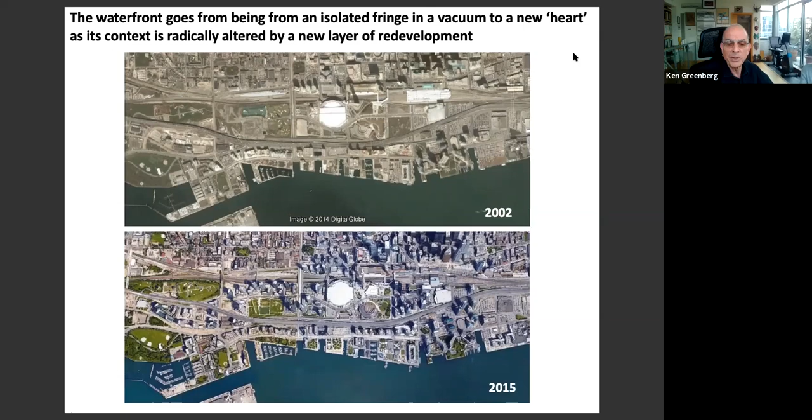I'm really pleased that my friend and colleague, and I would say mentor, David Crombie, is on this call, because since the 1980s we have been really fortunate in Toronto to be guided by a set of values that David Crombie articulated in his Waterfront Regeneration Trust, simply as clean, green, accessible to all. This has served as a set of powerful guideposts for us ever since.

Next. Oh, sorry, hang on. Sorry, one second. Okay, pardon me, something just odd happened. Bear with us for a second. Okay, let's see, share, hang on. Sorry, we just had a little glitch there. I'm not sure exactly what happened, but we'll get back on track. Hang on. Okay, one second, sorry about that, people. Okay, I'm gonna have to... all right, there we are, okay. Ken, do you want the screen after this? Yeah, can you bring the screen back? I'm not seeing it. Oh, you're not seeing it? No. Oh, okay, I'll try it again. Okay, here we go again. Let's make this - are you seeing it now? Because according to me, I'm sharing the screen. No? Not yet. Okay, I apologize for the technical glitches. Okay, I'll start. Okay, just bear with us for one second. If all else fails, I can grab the PowerPoint. Yeah, it's okay, no, it's okay. I occasionally - Zoom's an amazing tool, but it isn't always perfect. Okay, do you see it now? There we are, okay, go to the next.

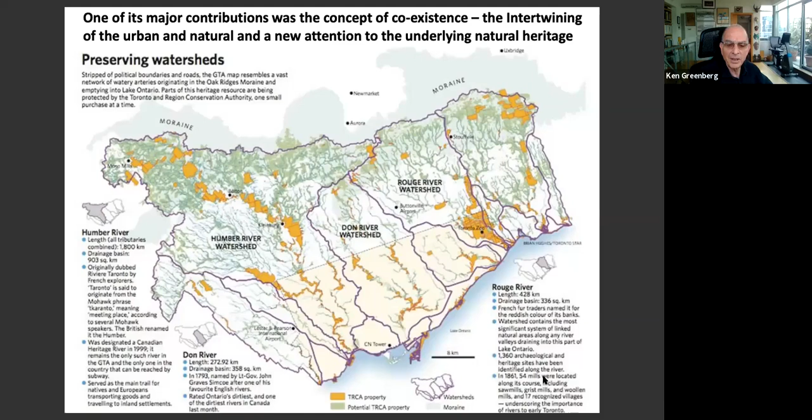Speaking of things that we found that we have inherited, that natural heritage is the most profound and significant layer that we are now reinterpreting. Next.

We have been, again, lucky in Toronto that we have an organization called Waterfront Toronto. This is a highly resilient organization, it's been around since 2001, and it was originally developed for an Olympic bid, which did not succeed. But through political administration after political administration - and those of you from Toronto will recognize previous generations of politicians, municipal, federal, and provincial - it has continued to provide guidance as we've undergone this massive change, with a commitment to community engagement and also calling attention to those found resources. Next.

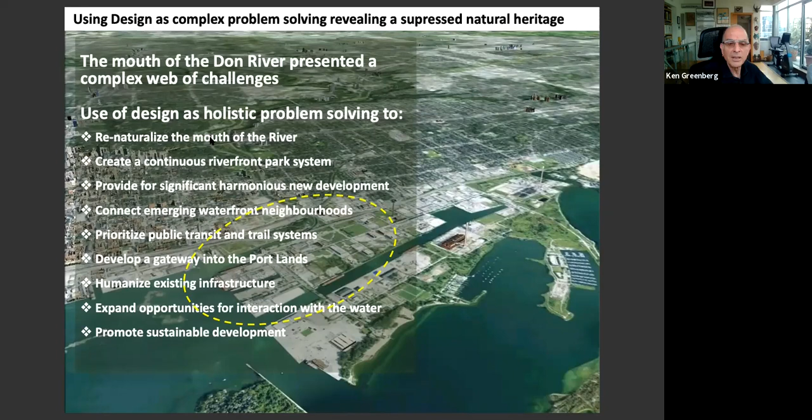What really inspired it was going back in time to the point when the Toronto Port Lands, some 800 acres, had actually been the largest wetlands on the Great Lakes, filled in 1912 by the Toronto Harbor Commission for an industrial era that never quite materialized for a number of reasons. Now there's a new opportunity to go back to that natural heritage and solve a flood-proofing problem and a whole host of other problems by creating this new river mouth with generous parklands.

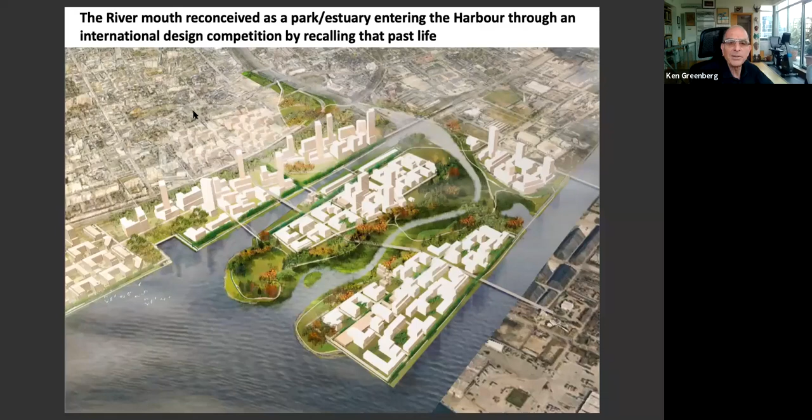So here you see this massive construction project that is currently underway. You can see in the curvilinear forms the river, which is reappearing, this natural feature, literally a ghost from the past, reappearing in the Toronto waterfront.

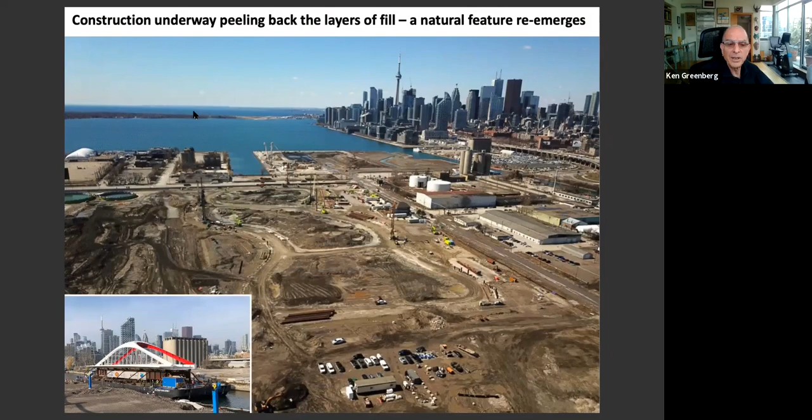And here are some images of the life which it now supports. So this found infrastructure is now reflecting an entirely different set of societal priorities.

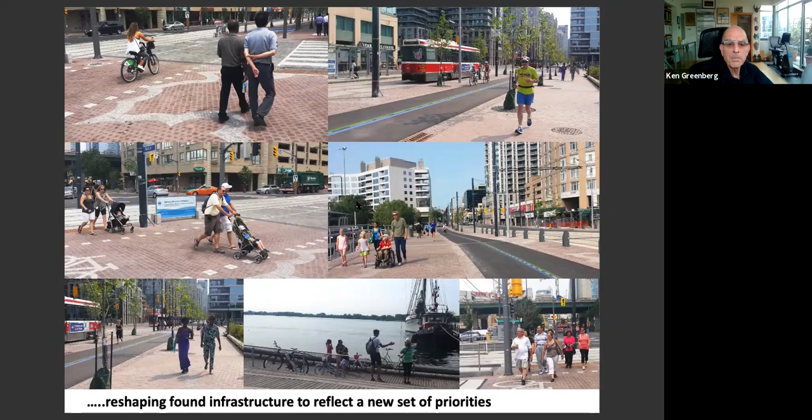So now I'm going to talk about the Bentway, which is one of the most extraordinary projects I've had the privilege to be involved in. And this is another case of an objet trouvé, a found object on the waterfront.

So this is an image of the Gardiner Expressway being built when this was all industrial. You can see Molson's, you can see the old Maple Leaf Stadium, you can see the Canada Malting in full operation - all of these industrial properties, Fort York barely surviving the highway, which was pushed slightly to the side to preserve it after strong citizen protests. But it was the space under the Gardiner that was so interesting.

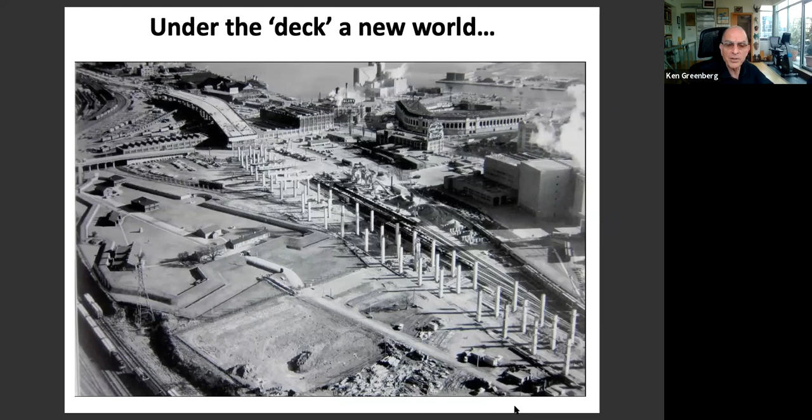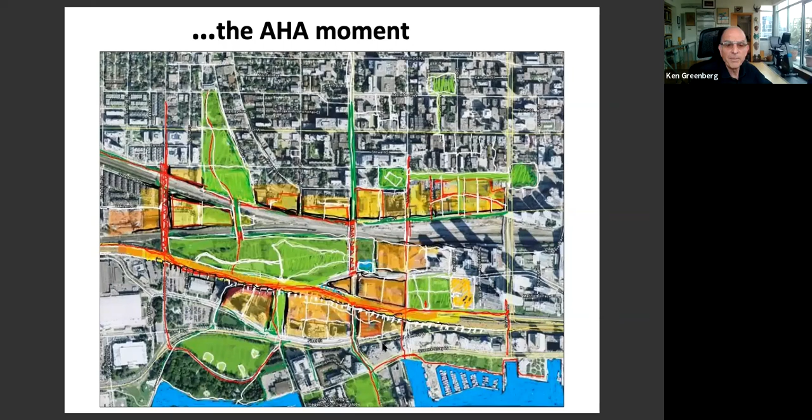This is Marcel Duchamp, with this whole idea of seeing things that are so familiar but with absolutely fresh eyes, and applying this to looking at the legacy of found spaces, found objects as reimagined places.

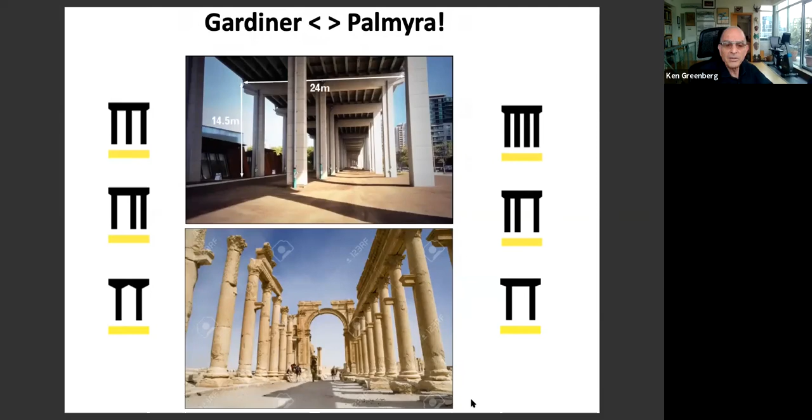So this is the way I was looking at the Gardiner, and oddly enough, the proportions of what was considered this extremely ugly intrusion across our waterfront - and in some ways it was - but almost 15 meters high, 24 meters wide, creating this magnificent canopy, which can be likened to the great arcades and colonnades of antiquity. So the opportunity here was how to reappropriate that space.

So in 2015, with an extraordinary act of civic generosity, I was approached by Judy and Will Matthews. Judy had been a colleague of mine at the City of Toronto, a city planner, and she and her husband were great benefactors of the public realm in the city, having worked on the music garden, the transformation of St. George on the university campus. They were looking for a legacy project. Etienne and I took them for a walk under the Gardiner, which you saw a moment ago, and we talked about this vision for what it could be. And lo and behold, they saw the same thing that I and we had seen.

Next. Sorry, hang on. Sorry.

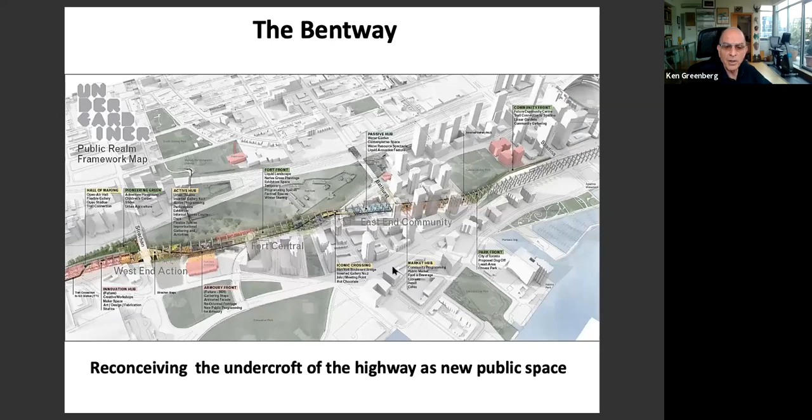So this was a drawing that was prepared with my young colleagues from Public Work, whom I brought into the picture very quickly, working with Will and Judy. I was contacted first in April. By July, we went to see the two councillors, Councillor Cressy, Councillor Layton, and Mayor Tory, and we showed this

image of what this could be, reconceiving the undercroft of the highway as a new public space. And what was so interesting about this is it was revealing the Garrison Creek, which had literally come down on the edge of Fort York. You can see where the harbor was. If you squint, you can see the lake, that bluish tone right next to Fort York.

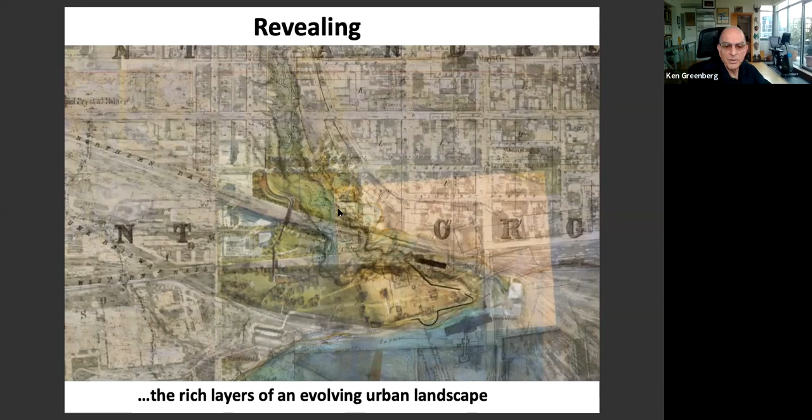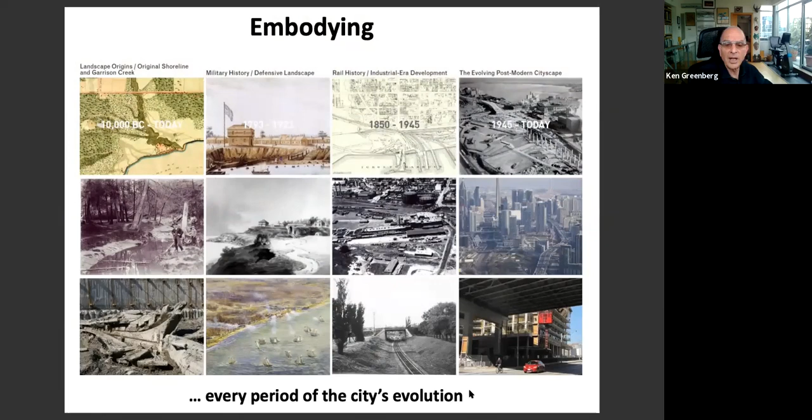And so this particular spot was so interesting because it embodied pretty much every layer of the city's history. Here, it had the capacity to tell all of these stories. The echoes of all these past lives were embodied at this particular spot. And so it was about literally connecting all these pieces of the emerging world.

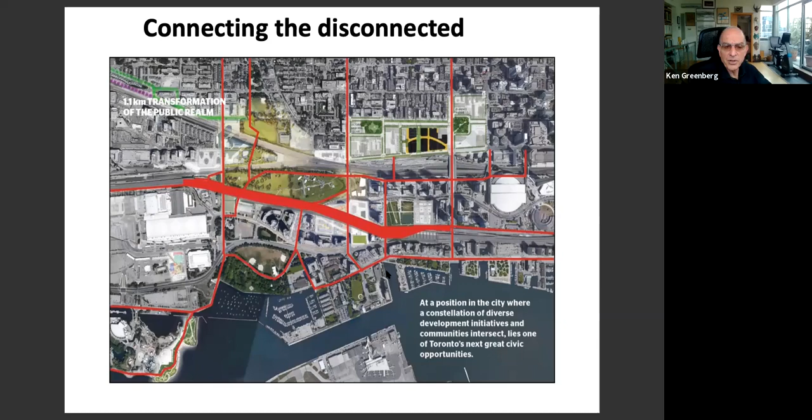It turned out to be an extraordinarily useful device, which had we not found it, we never could have afforded to create this great urban colonnade, this civic space in this location. But all of these thin red lines, along with the thick red line of the undercroft of the Gardiner, are part of the Bentway network. Some of these existed, many of them have been created since.

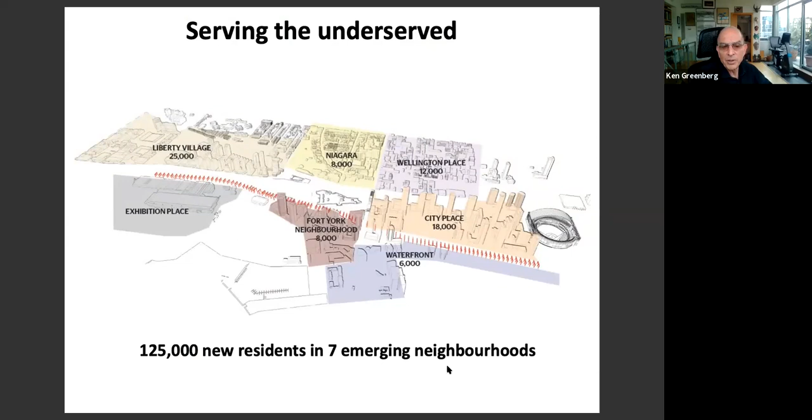So who would have imagined that this highway built in the mid-20th century, essentially to carry cars and trucks, would end up providing shelter for this great civic living room. And serving, by now, nearly 125,000 residents who have come to live in all these vertical neighborhoods in approximately 15 years, and who now have access to this space, which both serves them and connects them.

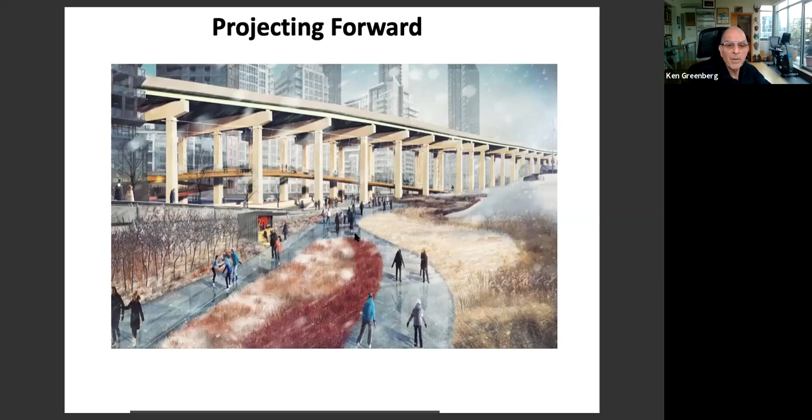What is most exciting for me as an urban designer is that when you do something like this, it sets off all these chain reactions and unexpected synergies. So at some point, quite a time ago, I identified some 16 things that probably would not have happened quite the way they did, but for the Bentway.

And now this idea of reinterpreting this found object, the elevated Gardner and the Lakeshore Corridor, the portion of it that you see running right across, about 3 kilometers across the Central Harbor, all the way from Exhibition Place over to the Don River has become a project of the City of Toronto, working with the mayor's office, with all the city departments, with a number of private actors, with the Waterfront BIA, with Waterfront Toronto, to take the spirit that the Bentway had engendered and apply that to a whole series of places across the waterfront.

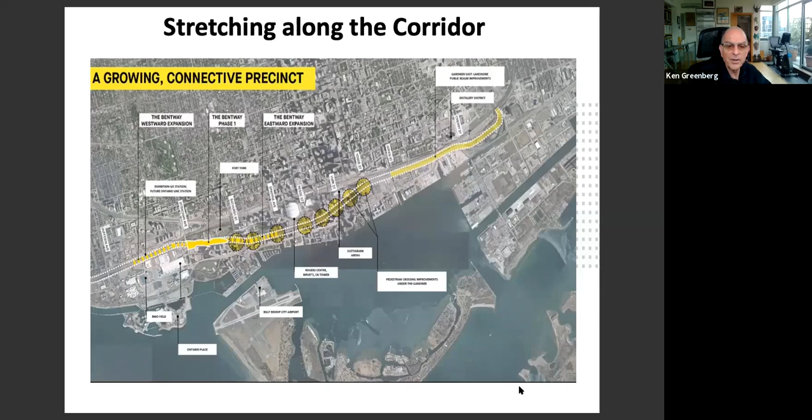And what it's producing in all of these neighborhoods is places that, but for the presence of this found structure, probably would not exist, and turning a barrier into a threshold. So I can make an analogy to Broadway cutting through the grid at an angle of New York City, and because of its angle, creating all these idiosyncrasies and all these found and special places.

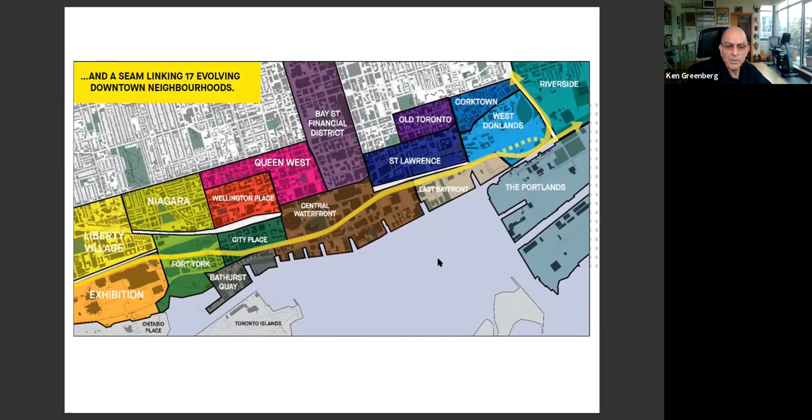So now I'm going to present something which is a bit of a cautionary tale, or an unfinished tale, about protecting a vulnerable piece of mid-20th century legacy.

Next, Ontario Place. This is a sketch done by Eberhard Zeidler, one of our best known architects in the city, when he was called upon by the provincial government of the day to create something inspired by Expo 67 in Montreal. He created this initial sketch, imagining this as a form of new urban parkland appended to the shoreline at Exhibition Place.

This great collaboration happened: Eberhard Zeidler's very precocious, technologically inspired architecture, which I refer to as the machine, collaborating with Michael Hough, an equally prominent landscape architect, unfortunately no longer with us, known for the movement to bring back the Don River, a strong ecological bent to all of his work, creating this garden setting for Zeidler's work. They worked together, so I refer to this as the machine in the garden.

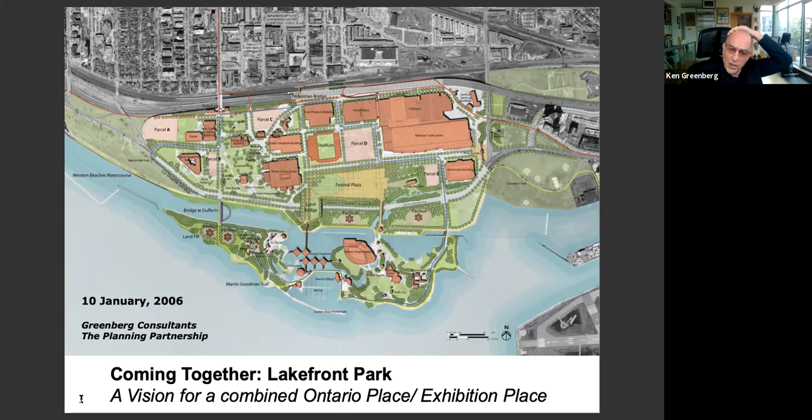But the idea at the time was that this consolidated lakefront park could extend, like an emerald arm, across the entire waterfront, linking to the Martin Goodman Trail, the Great Waterfront Trail, the Western Beaches, and what was happening in the heart of the city.

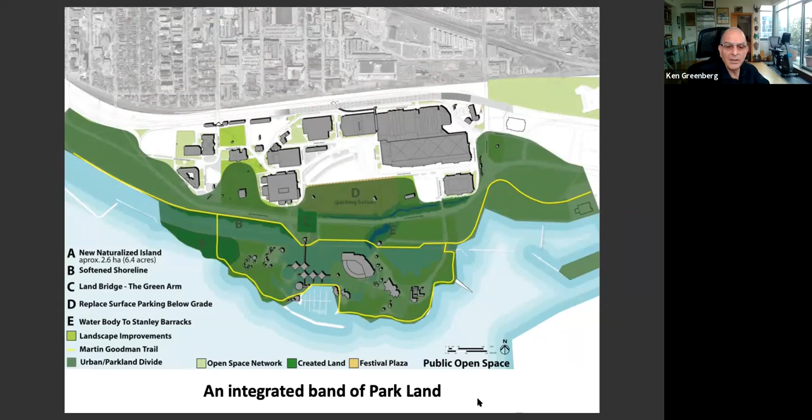This was a kind of image of that parkland stretching right across Lakeshore Boulevard, tying together the Central Waterfront and the Western Waterfront as an integrated band of parkland.

And this would be done incrementally, piece by piece, with early win projects that could be identified.

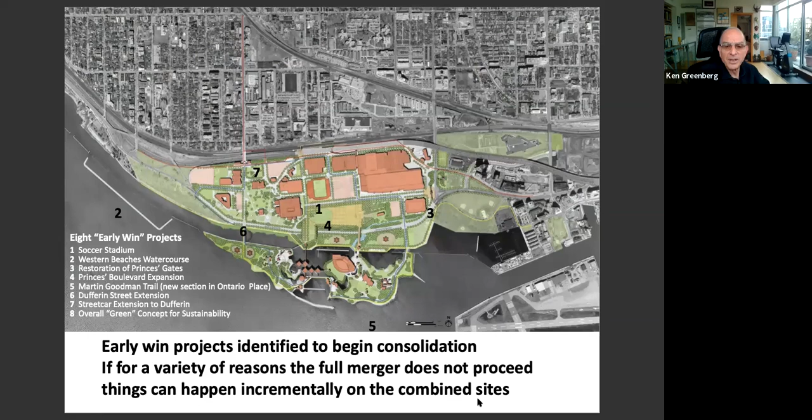In fact, until recently, this is what was happening. A provincial government recently began to implement this incremental vision with what is called Trillium Park and the William G. Davis Trail, named after Bill Davis, our former premier, a fantastic park taking over a parking and servicing area at the eastern end of Ontario Place and reinterpreting this found 20th century objet trouvé, this found place.

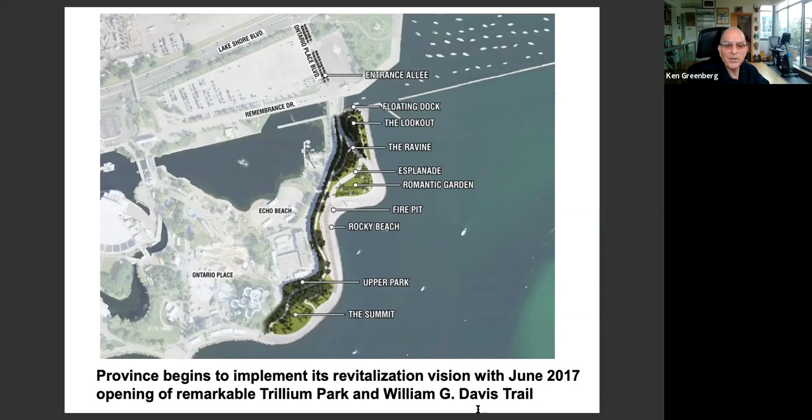And indeed, there was an extension of that idea going further to the west, which would more than double the size of Trillium Park, and would have carried this idea of a sophisticated landscape reinterpretation that Michael Hough had created, extending right over to the architecture of Eberhard Zeidler, had this process continued.

But it was brutally interrupted when a cabinet minister of the current government went down to the site and came back saying: the current state of Ontario Place is disgraceful, and there's nothing that can be saved. We need to turn it into a world-class attraction. Nothing is off the table, and the site will become more of an amusement destination than a waterfront one.

Now, obviously, this was a call to arms. And so immediately, Ontario Place for All, which is a spin-off from Waterfront for All, was formed in defense of this mid-20th century wonderful legacy called Ontario Place. Ontario Place for All has been actively working to try and call attention to the value of this great resource and forestall its destruction.

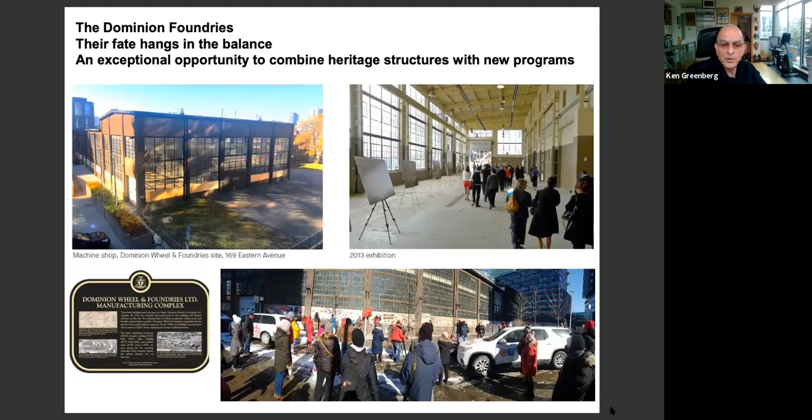And suddenly, on January 14th, a demolition crew showed up on the site, sent by the provincial government, and started to tear down these buildings. The Friends of the Foundry was formed very quickly to come to its defense. So it's kind of a story like Ontario Place.

And so I worked with the Friends of the Foundry with some great colleagues—Shirley Blumberg at KPMB Architects, Joe Lobko from DTAH, Luigi Ferrari from George Brown, Mark Guslits and Sean Gatton, great housing experts—and we produced very quickly a demonstration of how a robust development program could be combined with preservation of these wonderful found objects from the Foundry, combining old and new and providing, as you see here, great public spaces at Foundry Square and Foundry Lane.

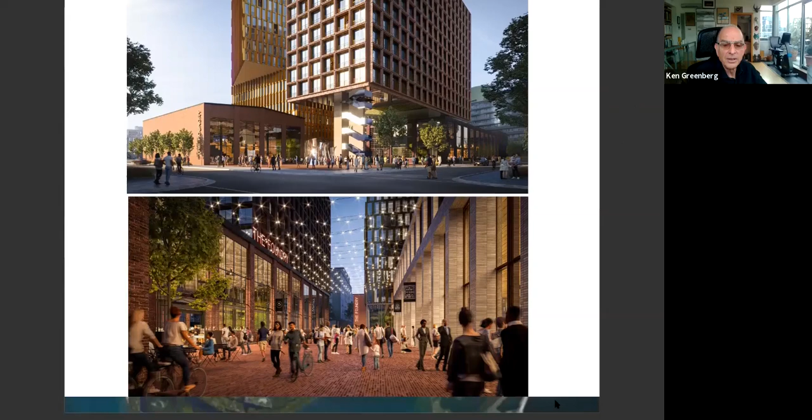And this is my final image and final point. This transformation of the waterfront is a huge multi-generational undertaking. It involves hundreds of actors. It transcends single political administrations. And to be successful, as this collage demonstrates, it requires very strong ongoing community stewardship, including an eye, as in the case of the Foundry or Ontario Place or the other examples I've shown you, on the natural and built heritage. This really stresses the importance of an organization like Waterfront for All. So with that, I will stop.

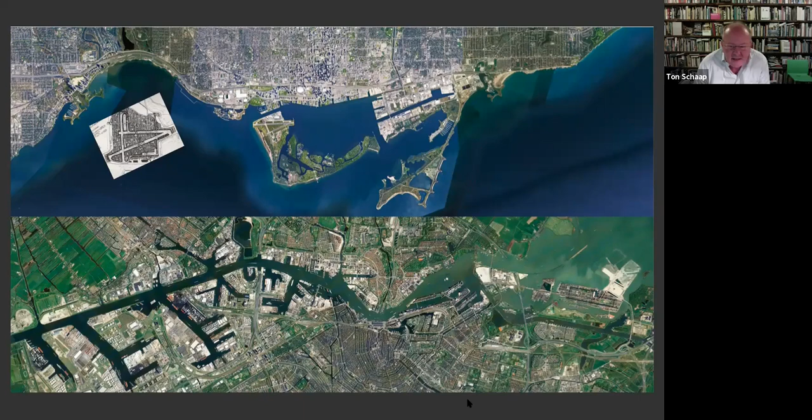Here you see a comparison of this waterfront part of town with Toronto. I found in an old book, Towards a New Toronto Utopia, an interesting proposal to redesign the city airport into a housing neighborhood where they left open the landing strips and filled in the rest with houses. A funny proposal that is exactly the opposite of what we did in the Eastern Docklands.

Where the harbor strips were built over, this moment of 1987 was perhaps my Duchamp moment, when I realized that we didn't have to change the whole form of this former, obsolete harbor, but we could simply consider it a found object.

I call it the Mikado Principle. You know the game of Mikado, you take these sticks out very carefully. And that's what we did. We took the sticks out very carefully. They all had their own numbers and colors, and they would have their own types of urban design, their own architects, their own atmosphere, but they would form together this new neighborhood.

This strategy of working island for island was later exported to the west part of the waterfront and also to the north side. You see the north side a little bit different from the south, with the green shoreline. All shores have been made public, accessible for everybody.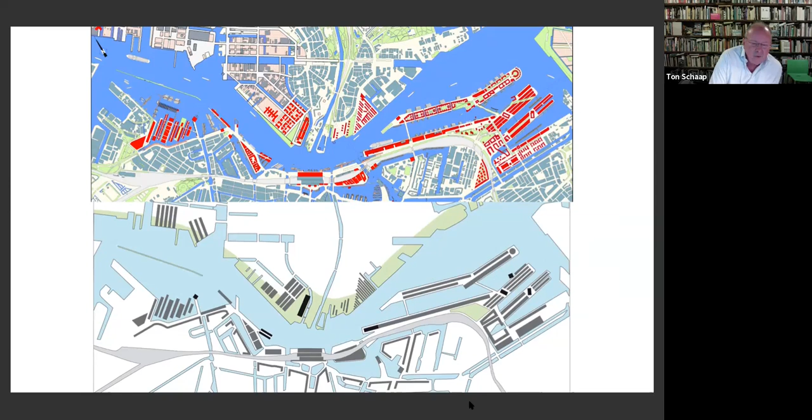That's the good thing about the name of your organization: the waterfront is for all. That's what the city council has always said, and what we have been very honored to make possible.

Not only the fixed elements, the quay walls, the water basins, the land, but also the boats, the floating elements that used to go to Germany and are now too small for present day traffic. They are, of course, very good houseboats, and houseboat is a very popular way of living in Amsterdam.

Here you see one of the islands where older and newer buildings are combined into a kind of new entity.

Here you see it in an old photograph from the air. The older buildings, the smaller ones, the quay walls, the houseboats arranged on the waterfront in a new way. And also this Mikado idea of the different directions of the different piers that work together to form new spaces.

Here you see the connecting dam from the north to the south. And here this combination of former harbor, now used for smaller boats and houseboats, new buildings, old buildings, all together.

Creating an atmosphere that people like, because that's what I can conclude after 20 years: people like to live here.

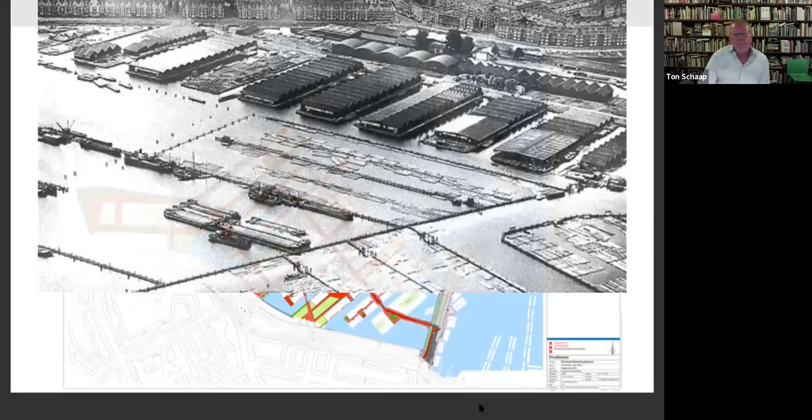Here you see the scheme we developed together with the people living in the existing neighborhood. We opened up the canals and elongated them until the dike. We put the car road below grade level. You can hardly see it on the drawing, but you will probably believe me.

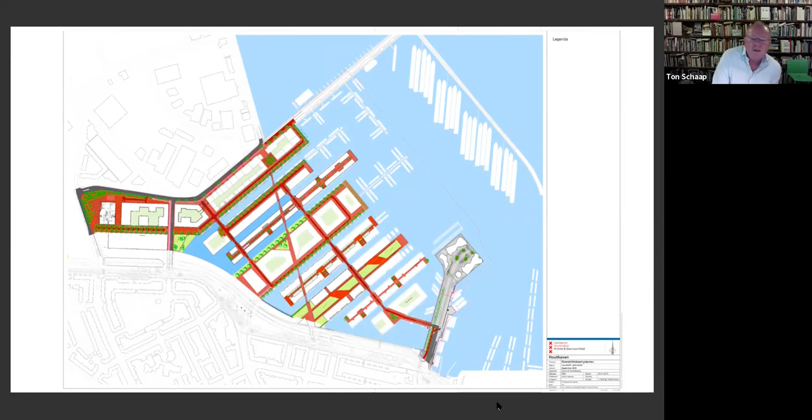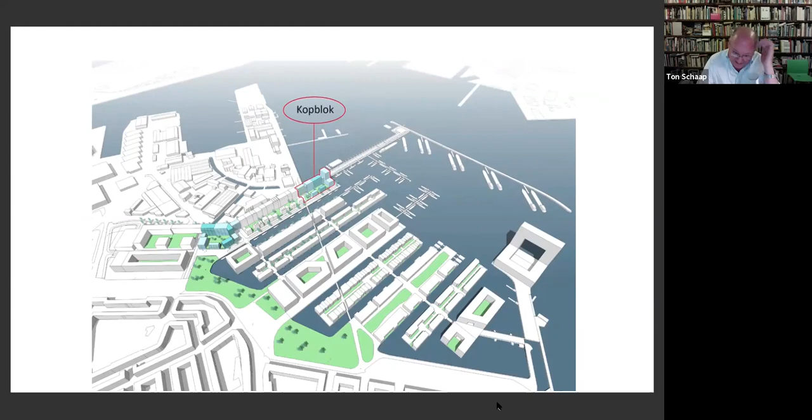All these new piers have different widths, because that was one of the lessons of the found objects on the east side of the waterfront - the width of the pier was very decisive for the kind of houses and atmosphere you could create. So we were looking for variations, and we created a meeting point between the old neighborhood and the new one, exactly in the middle of this slide, the green neighborhood park.

By creating these new neighborhoods along the waterfront, turning flat quays into a built-up city, the whole identity of the IJ changed from a water that was the border of town into a water that is like the Canal Grande in Venice, in the center of town. The building of the film museum was a decisive step in this.

A public function that also attracts people not living in North, but also from South, people from everywhere. Suddenly that was a big step for Amsterdam, that Amsterdam North was no longer a part of the city far away, but a part of Amsterdam.

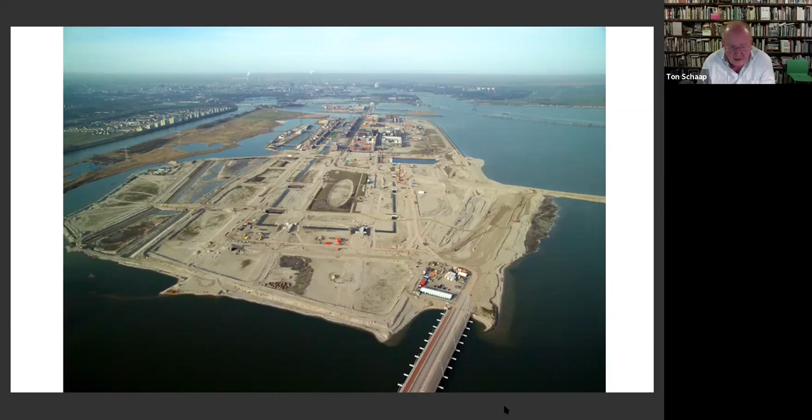And here you see it under construction some 20 years ago. The entrance from city side.

And the latest island, Centrum Eiland, which was also started at the moment that the real estate market was very low, and only private individuals were able to finance new construction. So you can see a lot of private houses and a few apartment buildings, all built by people in the city looking for new, wider horizons.

This is how it will look in a few years. And as we speak, on the right-hand side is the last phase of IJburg. In the meantime, it's under construction.

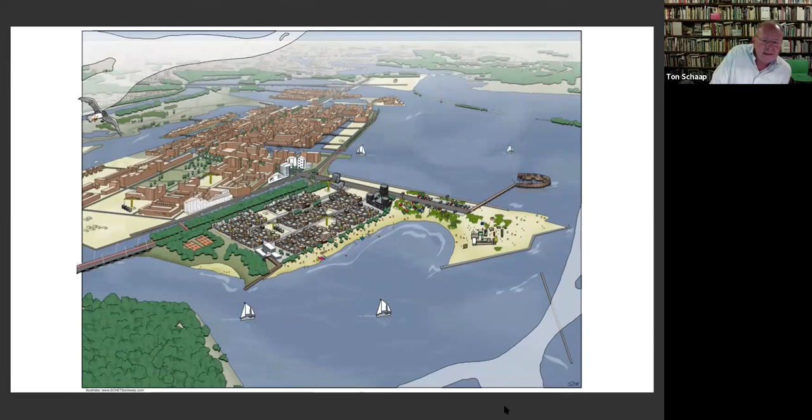The last slides are about the transport system—I told something about it already. This whole thing started in the 1970s with big riots by the population of the city, because the city planners had, just like Robert Moses had in New York, planned to make big thoroughfares for car traffic through the city.

There was even an American expert, David Jokinen, who had a big plan for Amsterdam with all kinds of 6-7 lane roads encircling the old town. Well, there was a real uprising among the population, and a totally new generation of politicians came into power, and they decided to stop this whole thing. So since the 1980s, we are building this kind of city that is walkable and bikeable, and that is accessible for cars, but not too many cars, and not all at the same time.

So we can keep the fine-grained structure of the city that is much liked by the people who live there, and many people who would like to live there. And that helps us very much to do this.

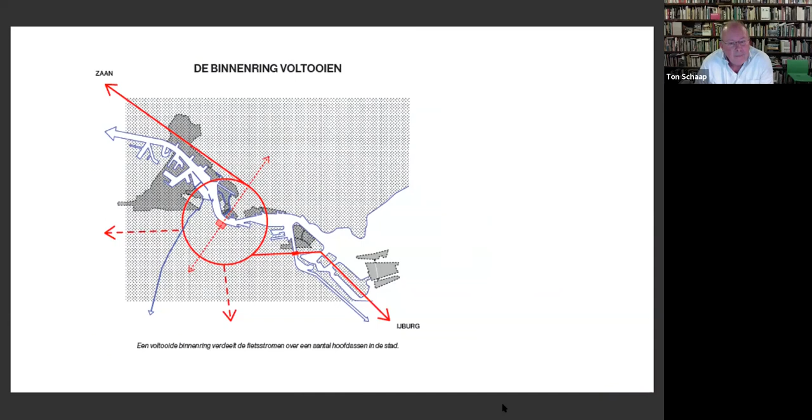And then, of course, this whole bike system has to be completed into a new ring. Amsterdam is always thinking in rings. This one is called the Binnenring, the inner ring, and it will be a bike ring. Two bridges will be constructed over the IJ, only for bikes. You can see one of them in the next slide.

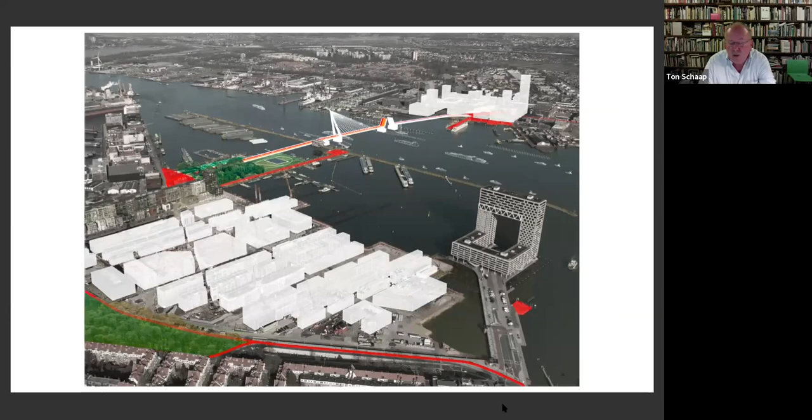Close to this timber dock neighborhood that is under construction, almost finished, there will be the western part of this ring. The whole Ij river, or estuary, is still a very busy transport route from the North Sea to Germany. So we have to take into account all these kinds of movements that must be necessary and must also be safely handled.

Well, this is how the map of the water part of Amsterdam, the northern part of Amsterdam, will look like after completing these two bridges.

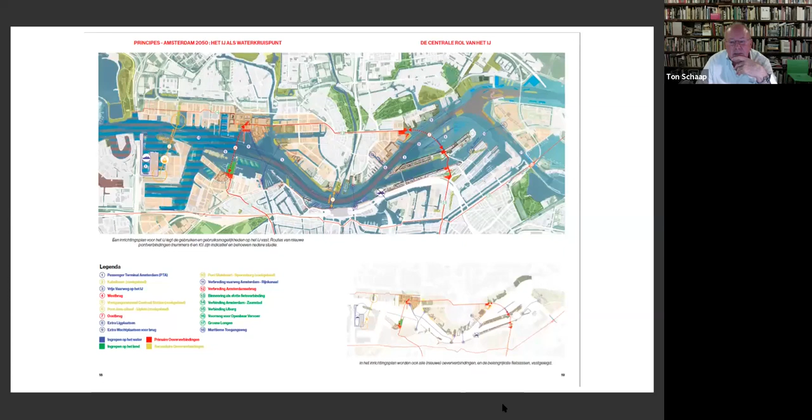Thank you very much, Ton. Wonderful presentation. I feel like we've just been to Amsterdam. That was lovely. Thank you. And of course, unfortunately, we can't really jump on a plane and fly over to see you right now, but hopefully we will be in the not so distant future.

It was interesting talking about that because you may know the story in Toronto. There was a proposal to build the Spadina Expressway right through what have become both extraordinarily expensive in some cases, but also very prized neighborhoods in downtown in the 70s. That was successfully stopped, and Jane Jacobs was a big part of that as well, as many others, and David Crombie and other people. But I was thinking, can you say something about the political and social support for mixed income neighborhoods in Amsterdam? Is that something that had to be fought for, or is that over time?

No, that's in fact, it has never been really discussed. Of course, the real estate market developments always tend to select some neighborhoods that do better than others, and then people who have money tend to go there. So there are these tendencies for segregation. Segregation is much discussed at the moment in Amsterdam, but in new developments, the city council...